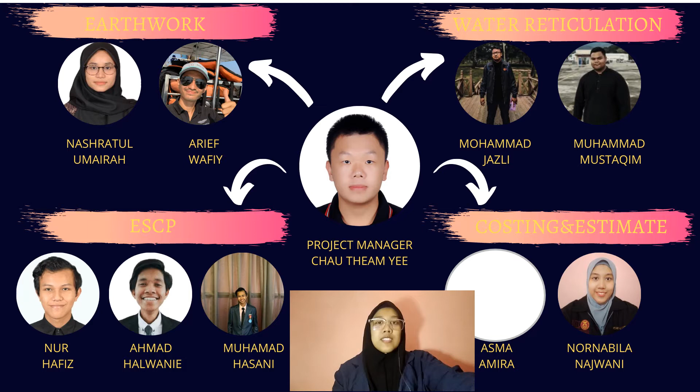Now I will tell you about my maiden presentation IDP report. First, we look at our organization chart. Our project manager is Chau Theam Yee. For the earthwork part, Nashratul Umairah and Arief Wafiy. For the water reticulation part, Mohammad Jazli and Muhammad Mustaqim. And the ESCP part, Nur Hafiz, Ahmad Halwanie and Muhamad Hasani. And the last, the costing and estimate part, is me.

Now we look at the site description. The proposed site layout for Zone A. The location of the project is very strategic and has easy access to town. From Senai International Airport to the project area requires only around a 20 minute drive, 15 kilometers. Nearest facilities to the project area are Johor Premium Outlet, 7.69 km, Hospital Sultanah Aminah, Paradigm Mall, Legoland, and Pulai Waterfall.

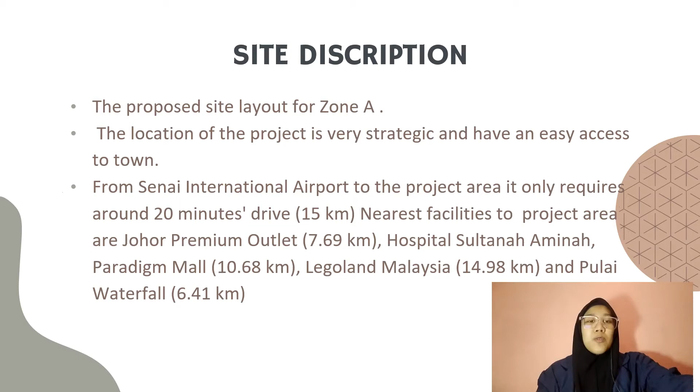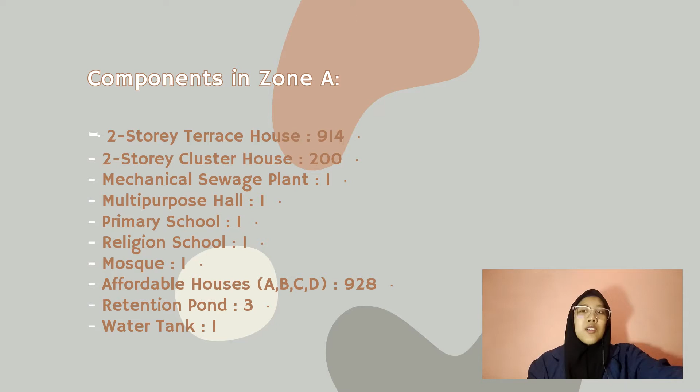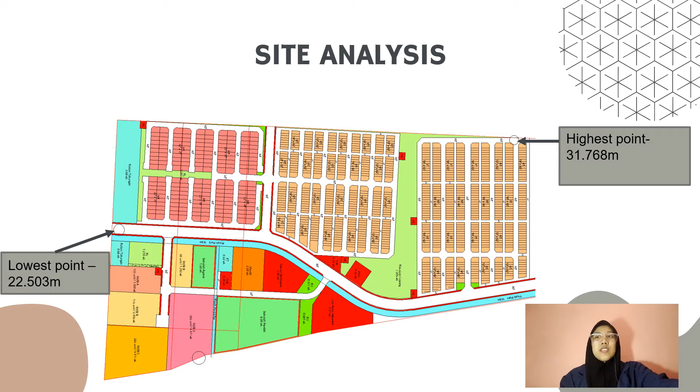Here is the site development and site inventory for Zone A. The components in Zone A are 2-story terrace houses, 2-story cluster houses, mechanical sewage plant, multi-purpose hall, primary school, religious school, mosque, affordable houses, retention pond, and water tank. From site analysis, we get the highest point is 31.768 meters and the lowest point is 22.503 meters. Here is the proposed level and cut and fill. Here we can see the purple part is fill and the yellow part is cut.

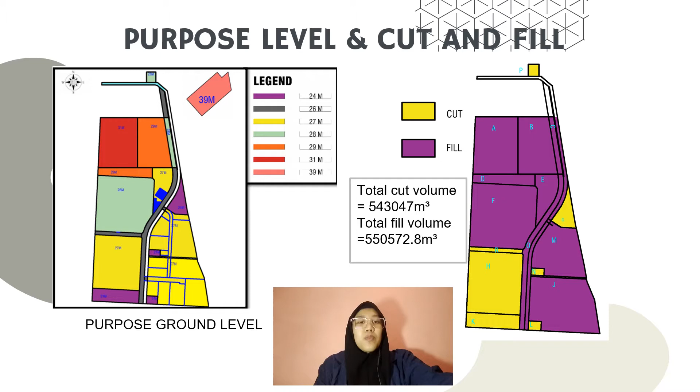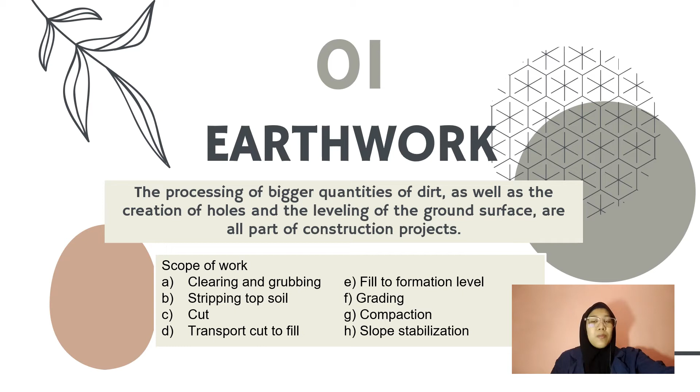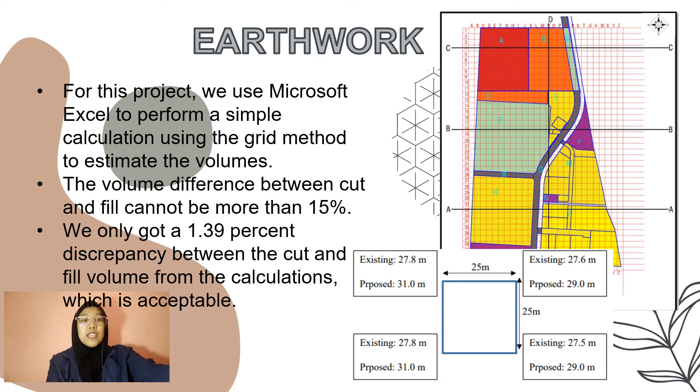Now we look at the earthwork. The processing of large quantities of dirt as well as the creation of holes and leveling of the ground surface are all part of a construction project. The scope of work is clearing and grubbing, stripping topsoil, cut, transport cut to fill, fill to formation level, grading, compaction, and last is slope stabilization. For this project, we use Microsoft Excel to perform a simple calculation using a grid method to estimate the volume. The volume difference between cut and fill cannot be more than 15%. We only got a 1.39% discrepancy between the cut and fill volume from the calculation, which is acceptable.

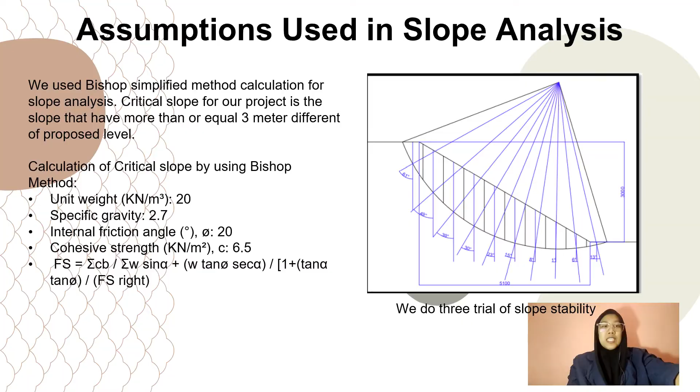For the assumption used in slope analysis, we use the Bishop simplified method calculation. A critical slope for our project is a slope that has more than or equal to 3 meters difference of proposed level. Calculation of critical slope by the Bishop method must find unit weight, specific gravity, internal friction angle, cohesive strength, and the factor of safety. And we do 3 trials of slope stability. The conclusion for the earthwork part: completion of earthwork within the specified program time is frequently the key to the project's on-time completion.

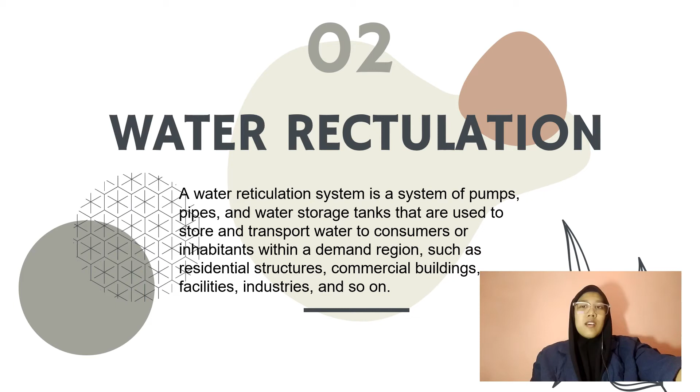Next, we look at water reticulation. A water reticulation system is a system of pumps, pipes, and water storage tanks that are used to store and transport water to consumers or inhabitants within a demand region, such as residential structures, commercial buildings, facilities, industry, and so on. For project design, this water reticulation system was designed to supply water for new development of housing and residential over an area of approximately 78.199 acres and with a proposed area over 202.244 acres at Mukim Pulai, Johor Bahru, based on a guideline. Pipe network system: in this project, we propose to use a closed-loop pipe network to analyze the reticulation pipelines for most of the buildings in the project.

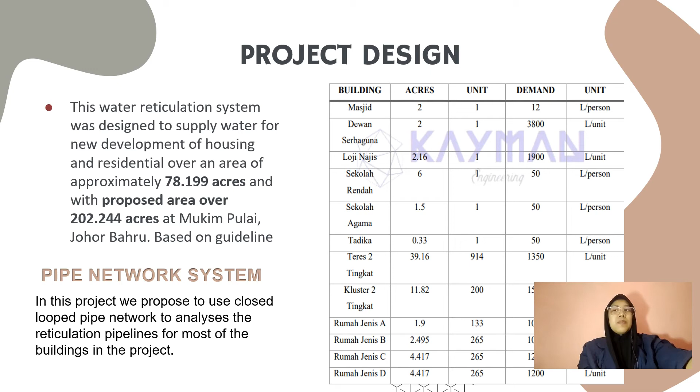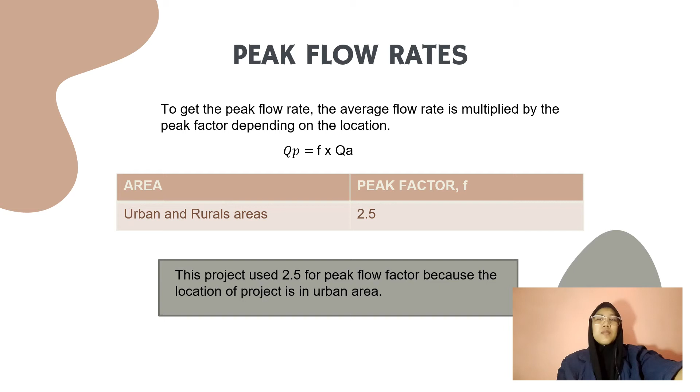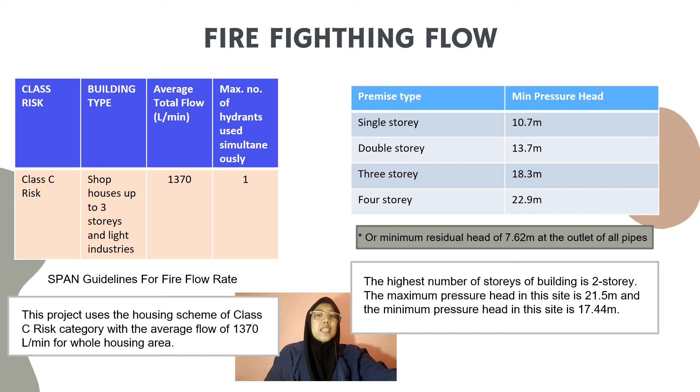To get the peak flow rate, the average flow rate is multiplied by a peak factor depending on the location. This project used 2.5 for the peak flow factor because the project is in an urban area. Fire fighting flow is based on the SPAN guideline for fire flow rate. This project used the housing scheme of Class C risk category with an average flow of 1,370 litres per minute for the whole housing area, and the highest number of stories of the buildings is 2. The maximum pressure head on this site is 21.5 meters and the minimum pressure head is 17.44 meters. Residual pressure head is based on the SPAN guideline. The recommendation for residual pressure is 7.5 meters minimum and 30 meters maximum.

To calculate the head loss, this project used the Hazen-Williams formula. Here we can see the formula. And for maximum allowable velocity based on the SPAN guideline, minimum velocity of 0 m/s to prevent deposition, maximum velocity of 2.0 m/s to prevent abrasion in pump suction pipe, and maximum velocity of 1.2 m/s to reduce problems with cavitation.

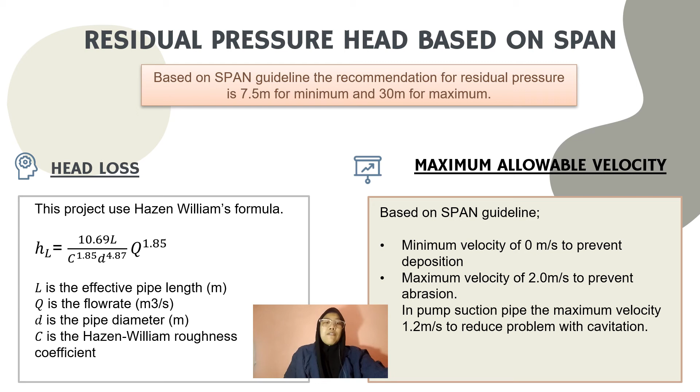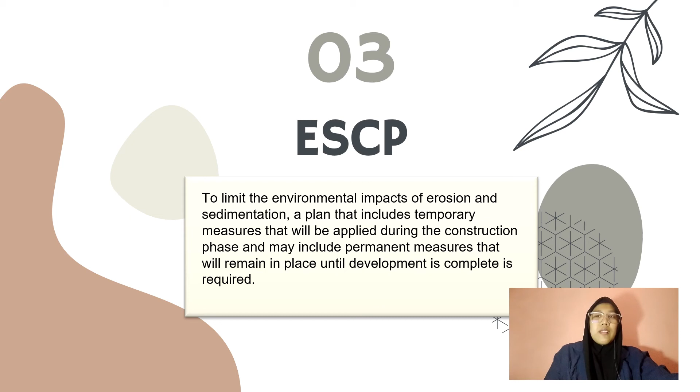Next, I will present ESCP. To limit the environmental impact of erosion and sedimentation, a plan that includes temporary measures that apply during the construction phase and may include permanent measures that remain in place until development is complete is required. For temporary earth drains, we refer to the Urban Stormwater Management Manual for Malaysia, MASMA 2nd edition. For the design criteria of temporary earth drains, we use rainfall estimation. First, we look at average recurrence interval (ARI). Next, time of concentration, and last, average rainfall intensity.